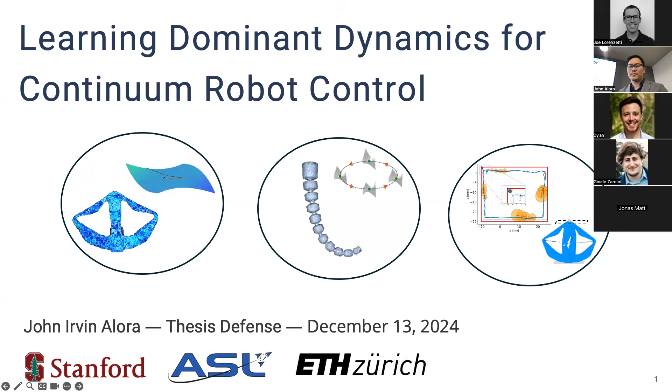My thing will start. Okay.

Before diving into my specific research, let me set the stage by looking at where we are in robotics today. Robotics is advancing rapidly, from household robots that can handle complex daily tasks to drones that can outperform human champions in drone racing. And I think what's critical here is that these achievements have relied on having accurate models, whether used for direct control or simulation-based learning.

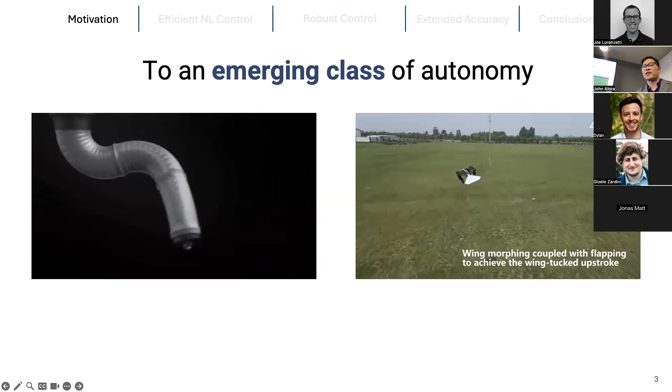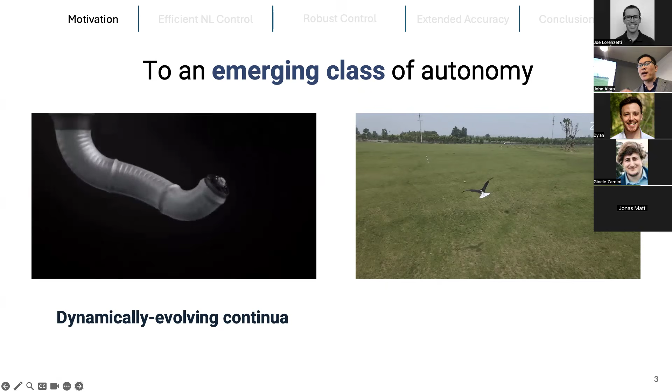But what if there are systems where deriving a model useful for control is difficult? This is the case for continuum robots, an emerging class of autonomous systems. Unlike traditional rigid body robots, continuum robots exhibit a dynamically evolving structure inspired by nature. These systems can bend, stretch, and flex like living organisms, allowing them to navigate complex and constrained environments with remarkable dexterity. But with great flexibility comes great challenges. Continuum systems are inherently multi-physics, combining mechanics, material deformation, and in some cases fluid interactions. They also operate across multiple timescales and have many more degrees of freedom compared to control mechanisms, making them severely underactuated.

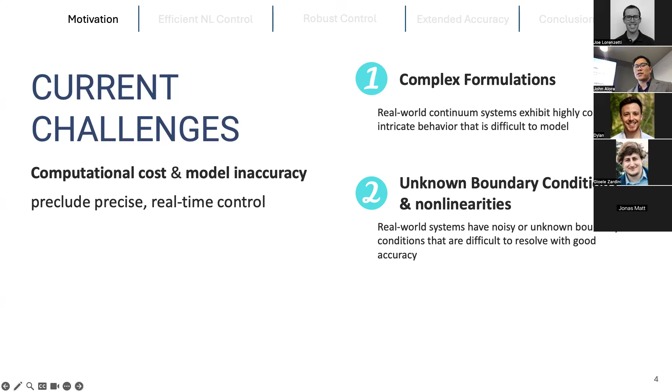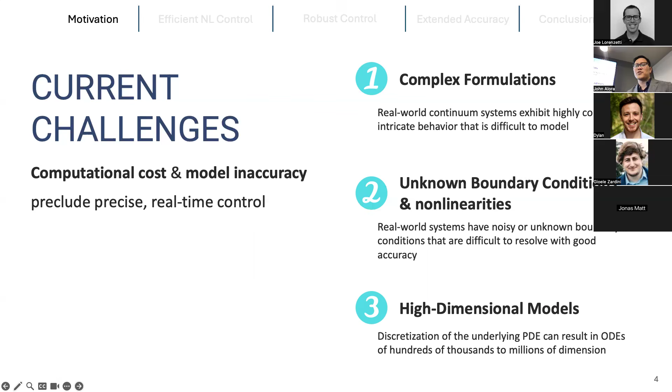This presents a variety of technical challenges. These phenomena result in complex models which need to describe how systems deform and move, as well as the intricate interactions between multiple physical phenomena. Second, these systems often operate with unknown boundary conditions. For instance, in practical applications like soft robotic surgery or underwater exploration, external forces and constraints may not be fully observable or predictable, adding uncertainty to the modeling process. Lastly, practical deployment for precise control tasks can result in models that are hundreds of thousands to millions in dimension. So these complexities really make deriving models for control incredibly difficult.

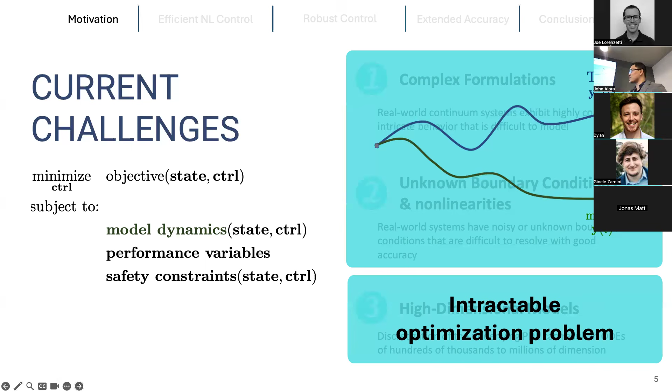More precisely, consider this constrained optimal control problem on the left, where we're trying to find a sequence of controls while minimizing some cost on performance variables and input, subject to the physics of the system. Due to the complex physics at play, inaccuracies stemming from the first two challenges can result in models that deviate significantly from the true system, resulting in poor predictions and hence poor control performance. While the third challenge results in high dimensionality of the model, making solving this optimal control problem intractable, especially if we want to do this in real time.

There are various approaches to overcome these challenges, which we can group into two classes: data-driven approaches and equation-based methods. Data-driven approaches try to learn dynamics from observed input-output transitions. Examples include neural networks, Gaussian processes, and operator-theoretic methods like dynamic mode decomposition. The inherent advantage of these approaches is that they're equation-free and non-intrusive—you only need data to characterize the model. The issue is that they're prone to overfitting, and it's difficult to quantify the uncertainty of the model, which presents challenges for safe deployment.

On the other hand, we have equation-based methods, which may also use data, but they use it to compress an already existing high-dimensional model, for example, like a finite element model. These include methods like projection-based model reduction, where you're trying to understand the evolution of your system's behavior on a linear subspace. The high-fidelity model here serves as a really strong regularizer that prevents overfitting.

But that same property that makes these methods robust also makes them cumbersome to implement, because extracting models from computational solvers is an encumbering and code-intrusive process. Furthermore, these models may still be too high-dimensional for actual real-time control when we use them in an embedded setting.

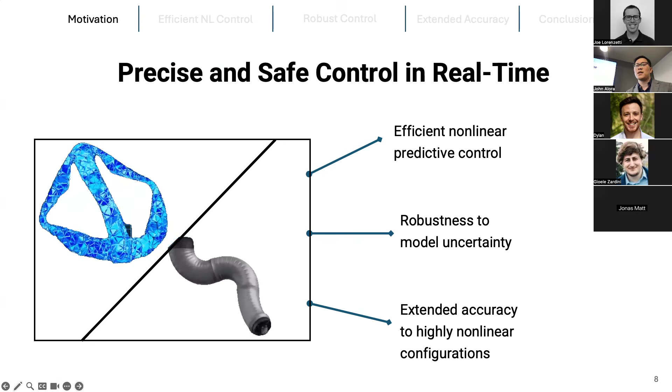In this talk, I'll focus on three core contributions I've made throughout my PhD: the introduction of a model-based control methodology that leverages learned dynamics on these spectral submanifolds, a method that guarantees this control scheme is robust to model error, and an extension of this methodology to achieve even greater accuracy when the robot significantly deforms, bringing us one step closer towards controlling these robots at the limits of their design.

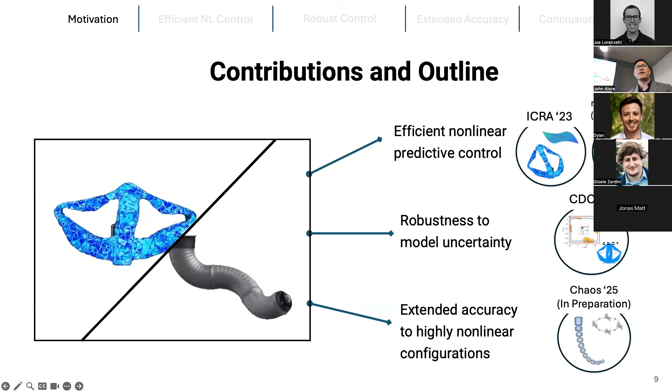This talk really summarizes the body of work I've published and presented to the broader robotics and controls community, all of which attempts to address the technical challenges inherent in enabling continuum robot autonomy.

Now, I want to ground these results by showcasing two types of robots. The diamond robot on your left is constructed from silicone and represented in both finite element simulation, approximately 10,000 dimensions, and an actual hardware replica of that robot. The control mechanism for this system consists of 4 cables pulling on its elbows to achieve a desired motion.

The second robot we'll consider is this trunk robot, also made of silicone, represented by a roughly 4,300 dimensional finite element simulation. It's controlled using a system of 4 cables that terminate at the midpoint and another 4 that terminate at the tip. The task is to control these robots so that they follow a pre-designated trajectory.

Now that you've seen the robots we'll be working with, let me walk you through the framework that enables their control. In this part of the talk, I'll briefly introduce what a spectral submanifold is, how to find low-dimensional dynamics on it, and then describe our model-based control methodology. I'll then present results where I compare the spectral submanifold reduction-based method to state-of-the-art baselines.

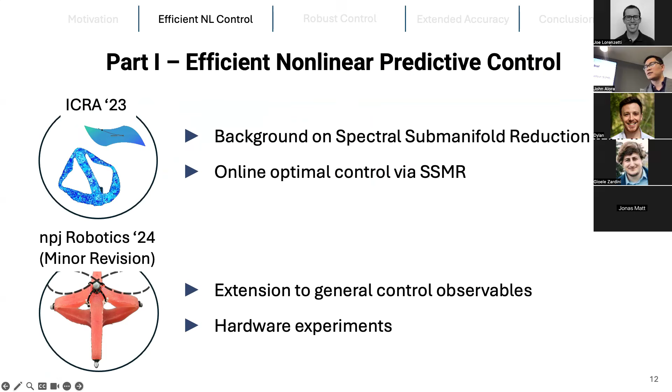Throughout this talk, I'll reuse some terminology that may not be standard. So to make sure we're all on the same page, I'll briefly recall some basic linear algebra facts that hopefully will help us build some intuition, while being just precise enough to really appreciate the methodology.

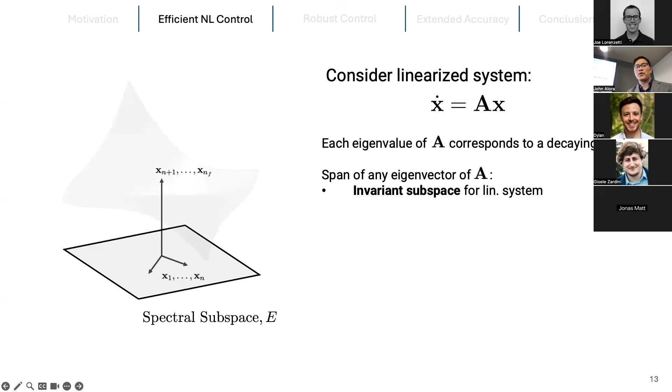So we'll start with the dynamics of a stable linear system defined by x dot equals Ax. In this system, different components of the dynamics evolve at different rates, determined by their eigenvalues. The slow modes are the components that evolve the slowest and persist over time, while the fast modes are the components that fade quickly.

Now, by grouping these slow modes, we define what we call a spectral subspace, which is essentially the space that carries the dominant long-term behavior of x dot equals Ax. More precisely, this space is spanned by the eigenvectors corresponding to the slowest eigenvalues. Crucially, this allows us to understand x dot equals Ax in terms of the slow modes while ignoring the ones that don't contribute to its long-term behavior.

This idea is really the basis for reduced order modeling, where we're trying to construct computationally efficient models that yet accurately capture the system's behavior, by constructing models that focus on the slow, persistent behaviors of the system.

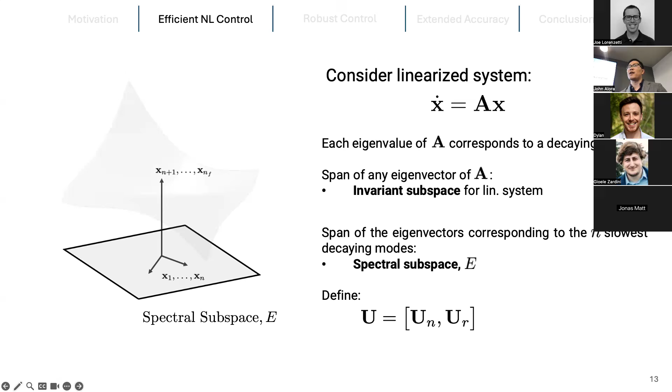Now that was for an unforced linear system. Let's ramp up the complexity a bit by adding this nonlinearity, but still staying in this uncontrolled case.

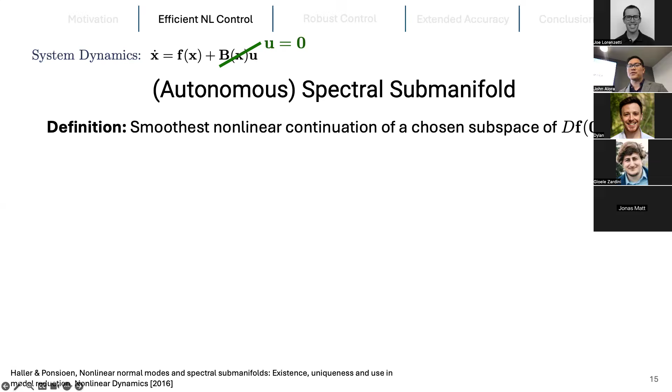It turns out that under technical non-resonance conditions on the slow modes of the system, the flat plane which defines the spectral submanifold or spectral subspace deforms into nonlinear surfaces or submanifolds which carry the dominant modes of the system. So intuitively, I can obtain the linear part of the dynamics of my robot, say by linearizing at its resting position.

I then group the slow modes commensurate with that linear part to define a spectral subspace, and deform that flat plane into a nonlinear surface. In the same way the dominant dynamics of a linear system can be understood by this flat plane, we can understand the evolution of the dominant dynamics of a nonlinear system by this surface or submanifold.

Now, an uncontrolled spectral submanifold is defined as the smoothest of these surfaces, in other words the surface that we can take the most derivatives on. And since this manifold is just a deformation of the spectral subspace, it has the same dimension, which means it's also low dimensional.

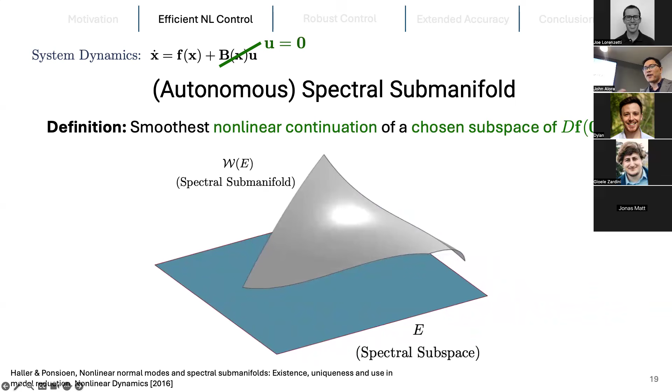Furthermore, it's an invariant surface, which means that once the trajectories land on this SSM, it stays on the SSM. Combining that with the fact that these robots' trajectories converge to the manifold exponentially fast, it is precisely the structure that effectively describes the dominant dynamics of this uncontrolled nonlinear system.

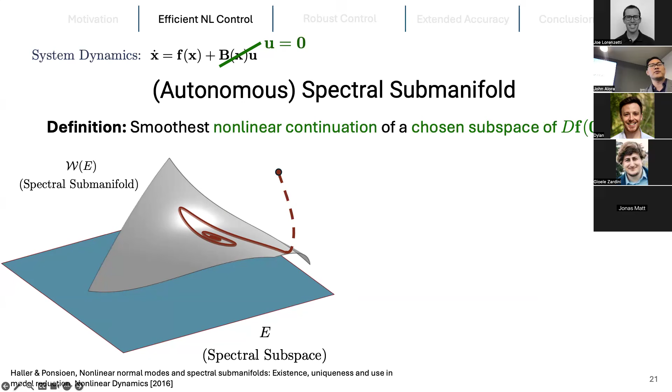Now, the nice thing in practice is that these SSMs actually exist for many dynamical systems, including our continuum robots. And when we add control, it turns out that these structures continue to exist, but in a time-varying analog of this unforced SSM. Recent work proves that the uncontrolled SSM actually survives as a time-varying manifold defined along the controlled trajectory, which too exists for our continuum robots.

And intuitively, the new target trajectory shown here actually takes over the role of a fixed point. And so we can define an SSM that's attached along this controlled trajectory. It's also exponentially attracting all of the trajectories of the robot onto it.

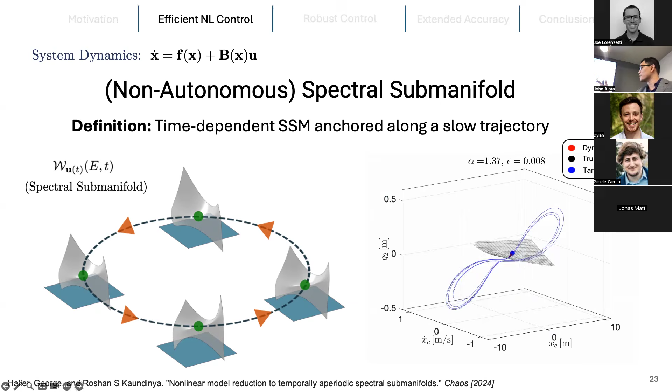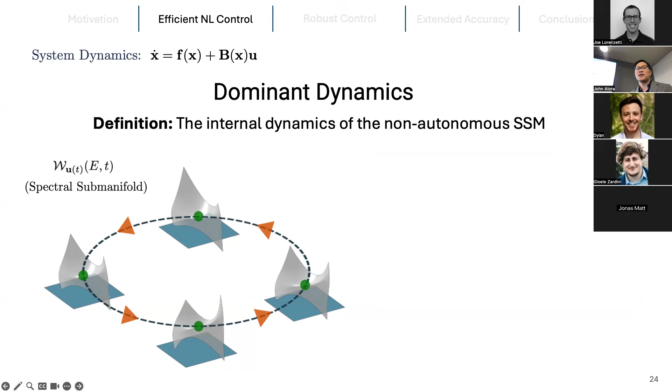And so when I talk about the dominant dynamics of my controlled robot, I'm actually talking about the dynamics on this non-autonomous SSM.

Well, it turns out approximating the dynamics on the non-autonomous SSM is actually challenging and may not be necessary if the target trajectory is sufficiently close to the robot's resting equilibrium.

And so in the first part of this thesis, rather than approximate the full time-varying SSM, which might be computationally difficult, we'll actually just approximate the uncontrolled part and then calibrate the learned dynamics for control. So we'll jump right into it.

The desiderata of our model that we're trying to learn: we'll try to learn a chart map, or in machine learning parlance, an encoder map, which encodes our observable measurements into reduced and latent coordinates. The reduced dynamics in this reduced latent space, and a parametrization map or decoder, which decodes the reduced coordinates into our original observables.

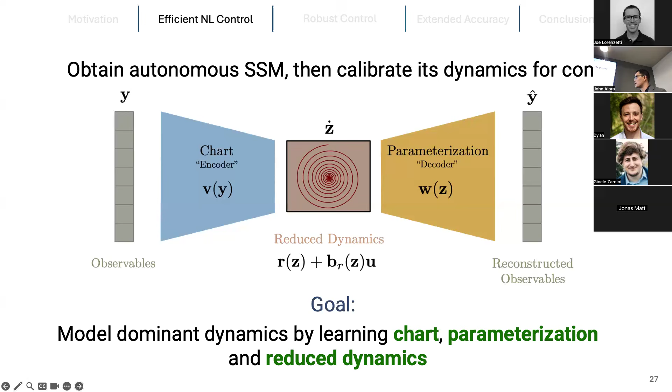Now, tying it back to the physical interpretation of the system, this chart map will be in the reduced coordinates defined by the dominant modes of the system, right? So we'll get these dominant modes via SVD, or singular value decomposition, of the system's evolution.

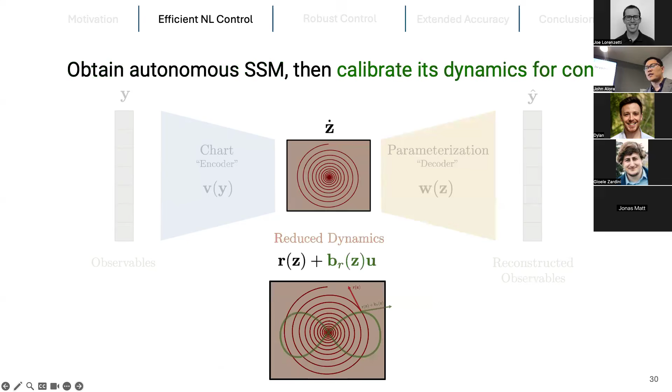We'll then obtain the parametrization map by fitting a function that minimizes reconstruction loss between the reduced coordinates and the observables, and then essentially fit control dynamics in our reduced space.

Okay, great. But you're probably thinking, how is there any hope that you're actually learning the dynamics given some generic measurements? Well, luckily, we can rely on fundamental results in nonlinear dynamics, which basically say that there is hope in detecting these dynamics from data as long as you have enough measurements.

And if you don't have enough sensors to measure, you can actually just take time-delayed measurements, and you can guarantee that you can detect these dynamics. So that's what we'll do: we'll pick sufficiently time-delayed measurements of the robot's end effector as the observables that we work with.

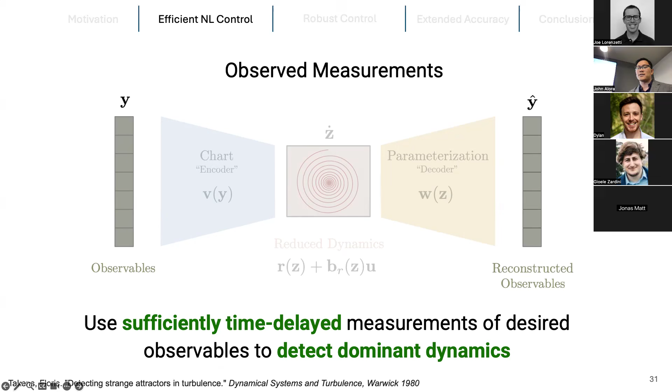Now, to infer the uncontrolled SSM, we'll start by collecting decaying trajectories of the system, observing, say, the tip of the robot. And to ensure our trajectories trace out the geometry of the surface, we'll truncate the transients from the trajectories to form our decaying data set.

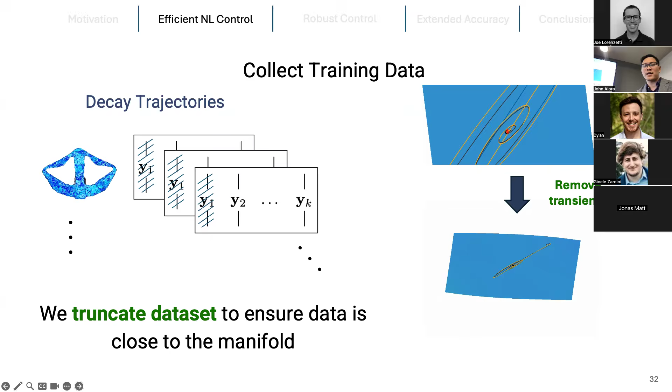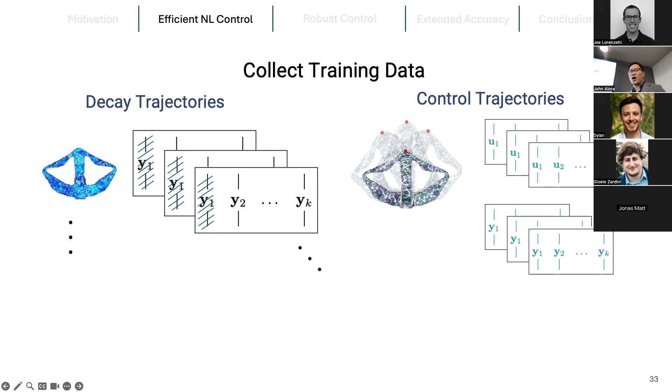Once we've collected data that'll characterize the uncontrolled dynamics, we'll then collect controlled data by simply applying random inputs and measuring the system's response. And I want to pause here and foot-stomp a really important point, which is that we're deliberately disambiguating the uncontrolled and controlled trajectories because it allows us to better capture these dominant dynamics.

Remember, our goal is not to fit a model to individual trajectories, but to this phase-space structure, to this SSM. And so fitting dynamics to the uncontrolled SSM serves as a really strong inductive bias towards fitting a model for control, because control trajectories will be close to this surface.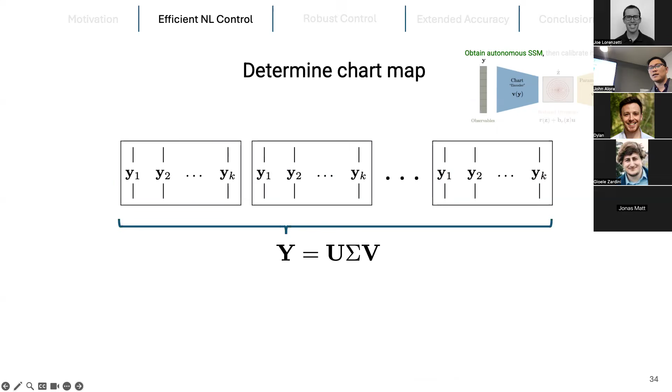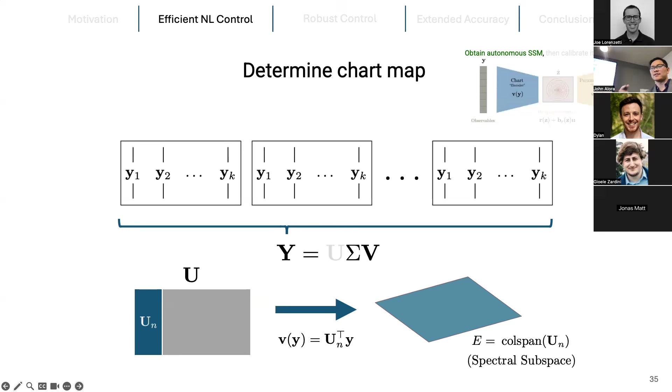Now, with this curated data set, we can proceed to learn our appropriate maps. First, we'll infer the chart map by conducting an SVD on our decaying data set. Then, by standard principal component analysis, we'll keep the top n singular values, capturing 99% of the variance in the data. This gives us the left singular vectors of the data matrix, whose leading n columns span this spectral subspace.

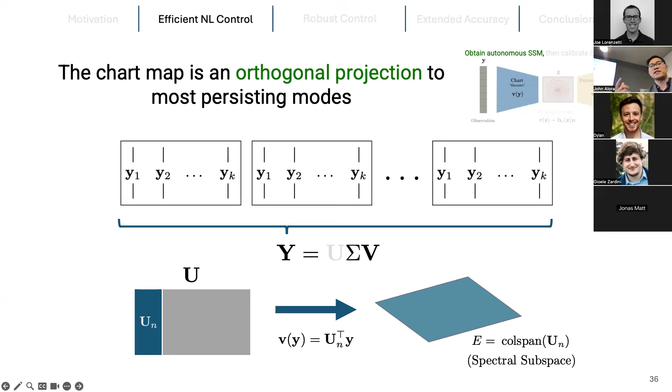When we construct the SSM, the chart map can be interpreted as defining an orthogonal projection onto the most persisting modes given by the spectral subspace.

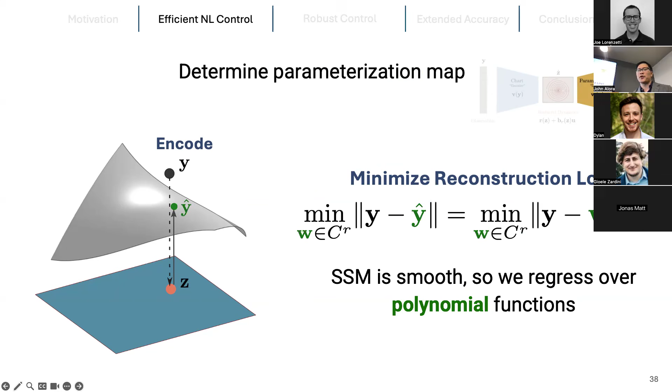Now that we have the chart map, we can take our trajectories and encode them into reduced coordinates, and then fit a map which minimizes the reconstruction error between the reduced coordinates and the observable space. Since the SSM is smooth, we'll opt to regress over polynomial functions. But in principle this can be any ansatz you'd like: radial basis functions, Gaussian processes, even neural networks. Knock yourself out.

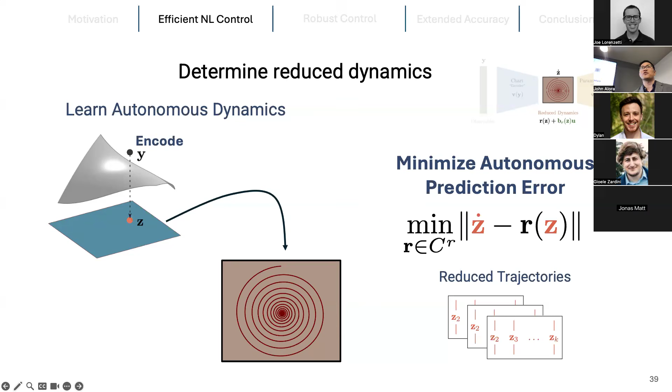Similarly, we'll fit the uncontrolled reduced dynamics by minimizing one-step prediction error. But this will only give us a description of how the robot decays to its resting position from some arbitrary initial condition. So to calibrate this model for control, we'll take our controlled trajectory data set and encode them into reduced coordinates using our chart map.

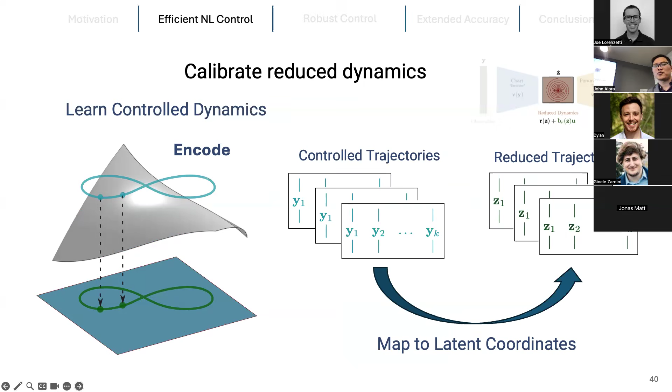Then we essentially regress the difference between the flow predicted by the uncontrolled dynamics we just learned and the flow of the true system encoded in the reduced coordinates, to learn a control vector field which results in the controlled dynamics to the right.

Now that we have all of the components of the model—the chart map, the controlled reduced dynamics, and the parametrization map which reconstructs our measurements—let's see how its predictive capability fares.

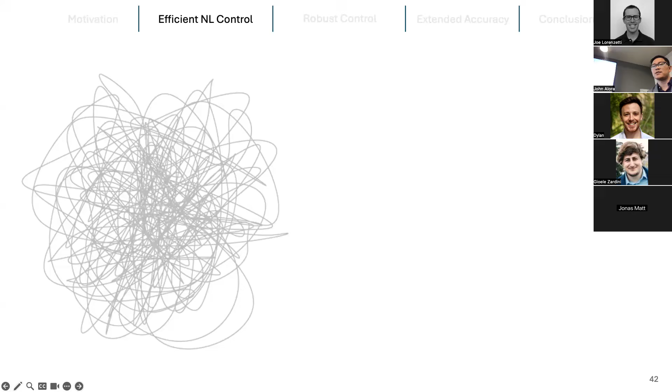To evaluate this, we'll collect a trajectory from the true robot by applying a random input sequence to explore its workspace. Then, with this data set, we'll randomly sample points along the trajectory.

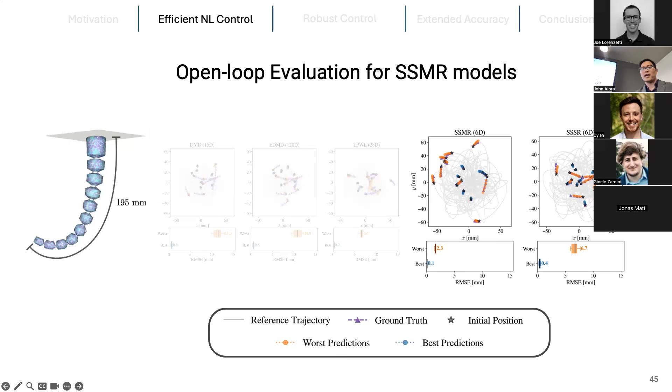What I'm showing here is a model that learns the dynamics on the nonlinear surface, denoted SSMR, and a simplified version which learns a model on the flat plane called spectral subspace reduction, SSSR. As expected, when we compare the two, SSMR outperforms SSSR because these linear models are unable to capture the geometric nonlinearities that manifest as the robot traverses this trajectory.

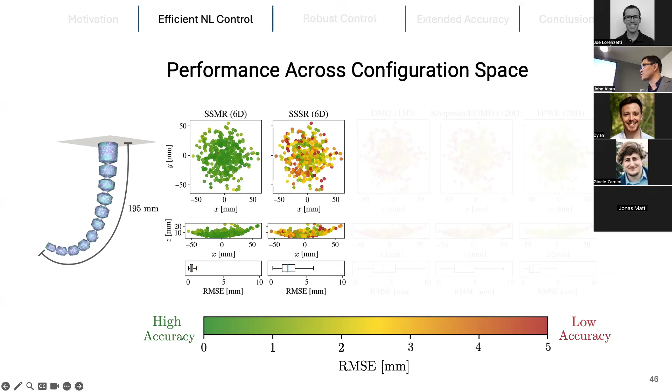Here, I'm giving a more global perspective on performance, doing the same exact evaluation as in the previous slides but for more points. We see that our nonlinear model outperforms our linear simplification again, and significantly outperforms the state-of-the-art baselines in continuum robot control.

We see that despite the fact that our SSSR models are linear, they outperform data-driven baselines, showing that capturing the dominant dynamics with a well-structured model can actually be more effective than approximating nonlinearities indiscriminately.

Furthermore, even though SSMR is fully data-driven, it outperforms this trajectory piecewise linearization method, which was derived from and was a compression of the true finite element model—further evidence that we can indeed get the best of both worlds.

And so now we close the loop and evaluate how well our model performs in trajectory tracking tasks. Specifically, at each control period, we observe the state of the robot, encode its state in the reduced coordinates, and then solve an optimal control problem using our model to find the optimal actions.

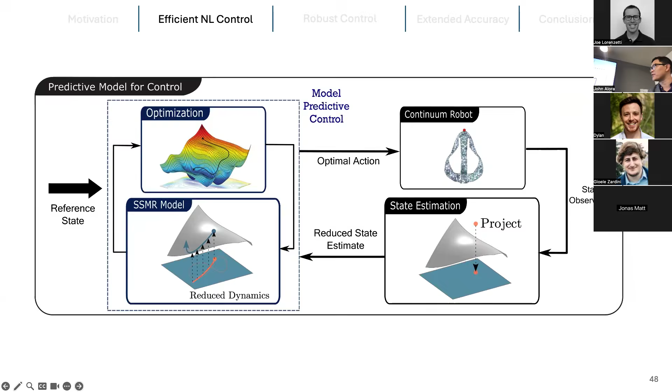The optimal control problem involves trying to achieve an objective while minimizing costs, subject to state estimate in the reduced space, the dynamics in that reduced space, and the desired observable and/or performance variables, for example the end effector of the robot, and the constraints on the robot.

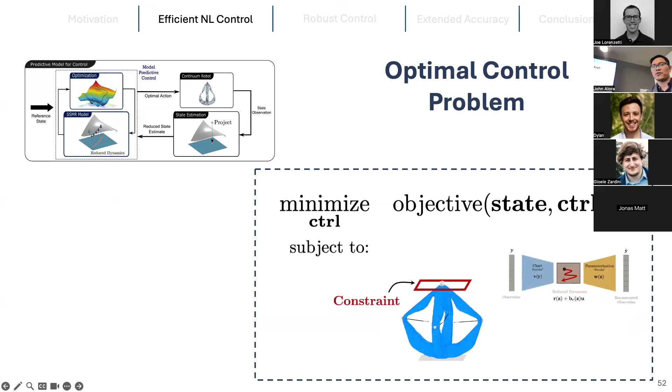Remember that the original robot is thousands of dimensions - in this case, this robot was 10,000 dimensions. The reason why we can solve this is because we use a lower dimensional surrogate to predict the robot's behavior. Surprisingly, when we compare SSMR-based models with our baselines, we achieve several factors of compression on top. This truly, I believe, allows for real-time control.

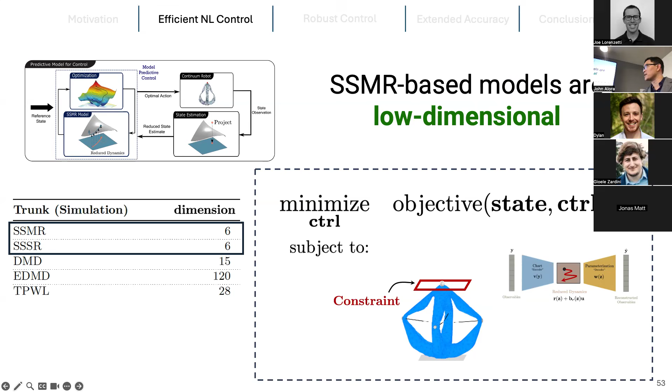Now, this observation highlights three things. Purely data-driven methods that just fit to individual trajectories tend to overfit, especially in the low data regimes. Priors essentially allow us to achieve better control generalizability. And we can actually get the best of both worlds - an equation-free method with the robustness capability of an equation-based method by focusing on learning the causal dynamics between input and output data.

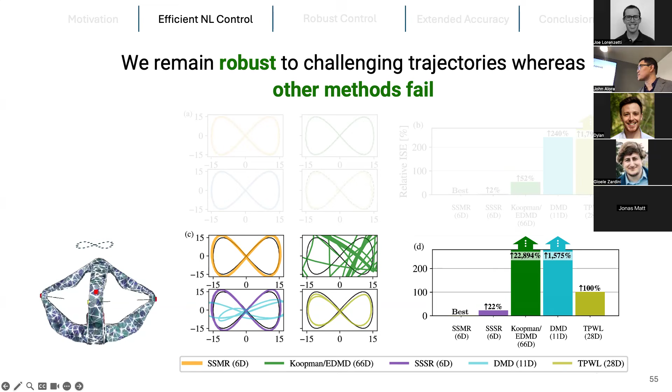Encouraged by these results, we employed these models on a real-world diamond robot and observed similar performance gaps between the baselines and our SSMR-based models.

So that wraps up the first part of this talk. In summary, what we did was we proposed an approach to approximate the dominant dynamics near an autonomous SSM. In doing so, we were able to learn compact representations of the robot in an equation-free manner, while outperforming both data-driven and equation-based baselines. And the reason why is because, again, we're learning the dynamical structure between input and output data.

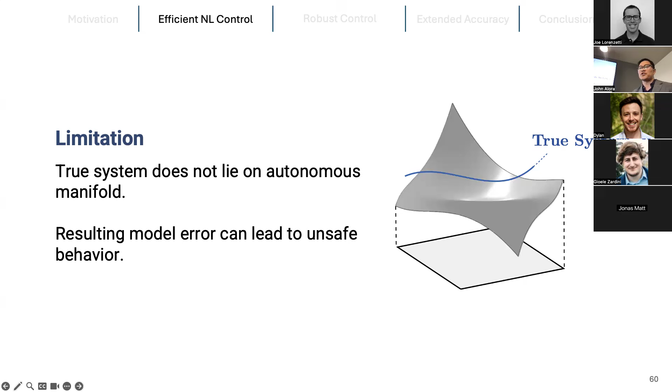Now, up until this point, while we can sort of impose safety constraints in our optimal control problem, it's with respect to our model. And because this model is a compressed representation of the true system, the true system under control may not actually satisfy the safety constraints. So in the second part of my talk, I'll tell you how we address this lack of safety guarantees by reasoning about the dimensionality reduction error and using it to design a robust model predictive controller.

So let's recall that we're learning a model that's anchored to this uncontrolled SSM and then calibrating that model for control. While this manifold or surface is invariant for uncontrolled trajectories, it's not invariant for controlled trajectories. But what we can do is think of control and disturbance as forces that push the true system behavior off of the manifold.

And we'll use that intuition to design a control scheme that controls the robot and ensures constraint satisfaction, even under model reduction errors. So in an attempt to build up that intuition, we want a controller that is uncertainty aware, such that when it gets close to the constraint, rather than allow the true system to violate this constraint, it proactively reacts to prevent the system from violating the constraint or becoming unsafe.

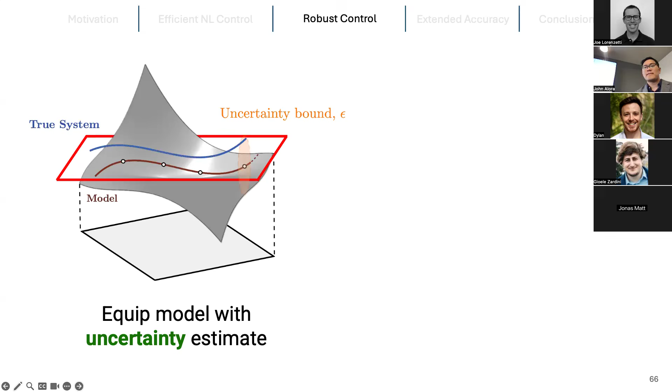Now, the core of being able to do this is to first equip our model with an uncertainty estimate that tells it the worst case error at any given time. And then, based on this worst case error, tighten the constraints for our model so that the true system is guaranteed to satisfy constraints and remain safe.

Suppose we have some constraints on our performance variables given by this inequality set. We tighten these constraints by constructing an error-bounding system which quantifies the uncertainty between the true system and the model, and then adding it to the constraint shown here.

To minimize conservativeness, we'll construct this error-bounding system so that it predicts error over the planning horizon, so it can adapt its uncertainty based on its state and its control.

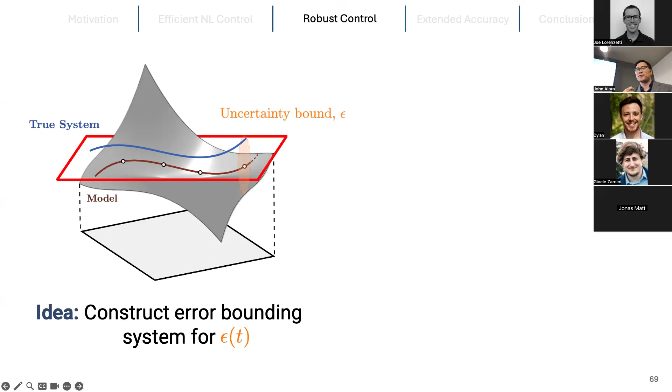Since we don't know the true system, which is extremely high dimensional, this task of quantifying the uncertainty is highly non-trivial.

Fortunately, the structure we obtained by learning models near uncontrolled SSMs will be useful in solving this problem. We'll use that same intuition as before, that control and disturbance push the true behavior off of the uncontrolled manifold, to help us characterize the uncertainty of our manifold-based model.

To be precise, I'll introduce some more notation and corresponding notions. The charted system represents the true system evolution in the reduced coordinates, while the manifold restriction represents its evolution on the manifold.

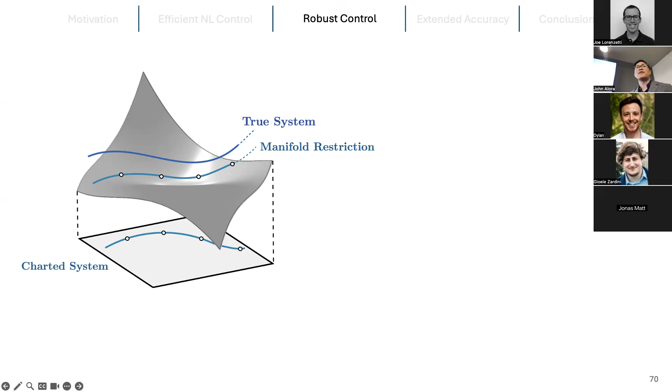In addition, we have our SSMR model discussed in part 1, which gives a reduced prediction and its commensurate prediction on the manifold, as shown here, which we'll denote as such.

The key idea is that by upper bounding the error between the true system and its projection to the manifold, as well as upper bounding the error between the prediction of our model and the evolution of the system in these reduced coordinates, we can construct an uncertainty estimate which upper bounds the worst case possible error between our model prediction on the manifold and the true system.

Looking at the first part, we can construct an error bounding system of the off-manifold error. When we stare at these equations, we see that it aligns with our intuition.

We see that it can be interpreted as the system being pushed off of the manifold when we take into account control. We have essentially a control term which quantifies how much the control pushes the true system off of the manifold, with the error being directly correlated with the magnitude of that control.

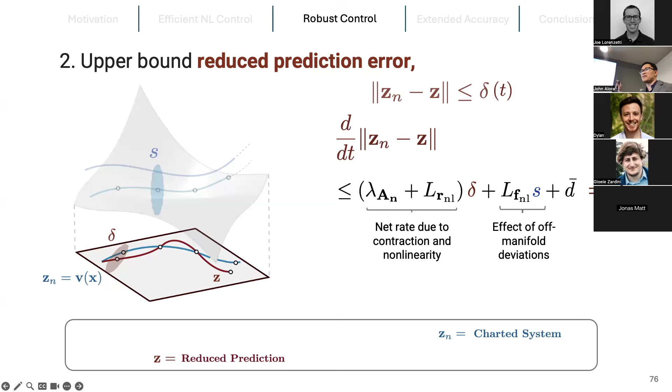Using these two quantities, we can then construct our uncertainty bound as being proportional to the reduced prediction error and the off-manifold error.

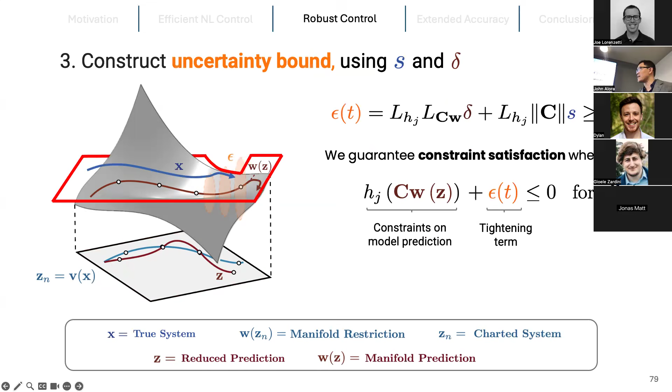When we add this to the constraint as a tightening term, it allows us to design an MPC scheme which guarantees recursive feasibility and constraint satisfaction, as well as asymptotic stability to a controlled set point.

To showcase the efficacy of our robust MPC framework, we consider the following example where we have a diamond robot's tip following a periodic square trajectory while staying within the desired workspace, then after following this trajectory, trying to track a set point on the boundary as close as possible.

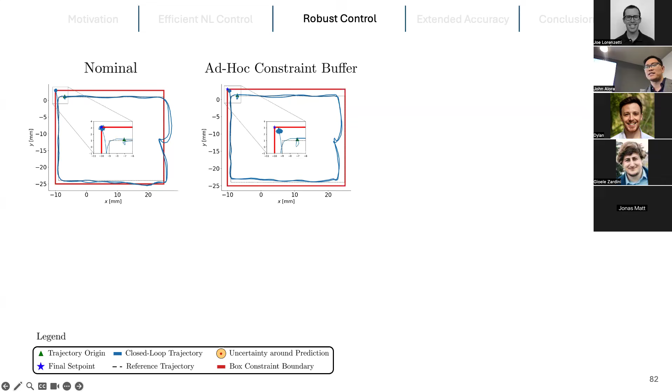To contextualize our method, we conduct simulations where we don't account for this model error—this is just the nominal MPC framework—and where we manually tighten the constraints.

As expected, nominal MPC violates the constraints, while our ad hoc constraint tightening scheme requires hand tuning to the particular control task, which in turn could lead to conservative behavior, and perhaps during the trial and error of tuning may cause the system to actually violate constraints, which would not be safe.

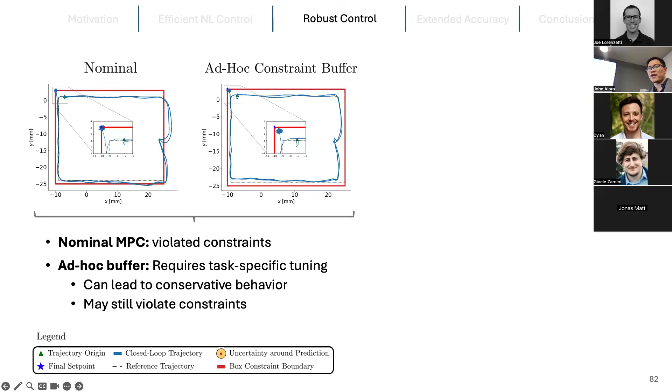On the other hand, our method achieves zero-shot constraint satisfaction. The constraints dynamically tighten, and it's recursively feasible and correct.

If we combine this robust MPC design with our model in part 1, we endow these robots the ability to safely act in the face of model uncertainty. Our methodology allows these robots to do this dynamically for any control task with minimum human intervention.

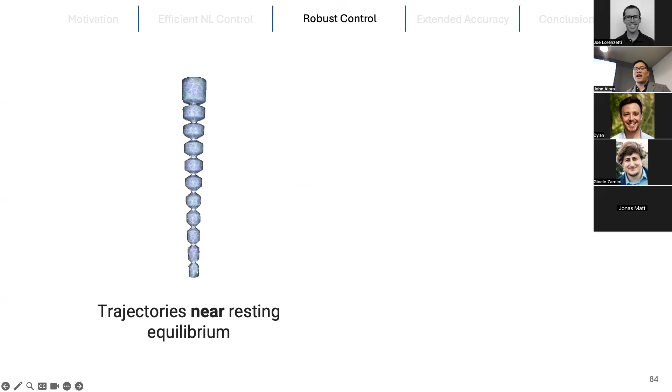So far, all of the control tasks considered have been tracking trajectories in the planar direction. But if we want these robots to be more useful and perform closer to the limits of their design, we need to extend the accuracy of these models to account for more geometric nonlinearities.

This brings us to the last part of this talk, where I discuss how we can extend the original SSMR framework to handle more interesting tasks where we have significant motions in 3D. Previously, our models relied on the assumption that the input was sufficiently small to ensure that the control trajectories were near the manifold at the origin. Here, we remove that assumption by approximating the SSM attached to control trajectories. This approximation comes from a spatial interpolation of local SSM models, and we'll show that these models are accurate when the control trajectory is sufficiently slow. Furthermore, we show that the model performance degrades gracefully with the speed of this control trajectory.

Let me try to make this a bit precise. Suppose I have this continuous reference trajectory that I want my robot to follow. I'll take discrete points of this trajectory, assume I can find some control to get to that point, and then construct a local frozen-in-time surface, or SSM, that's anchored to this new forced equilibrium. If I do this for each and every point along my reference trajectory, and then turn the time on, i.e., make epsilon greater than 0, then one can show that a time-varying SSM actually survives as a perturbation of the local SSMs that we've constructed along this trajectory.

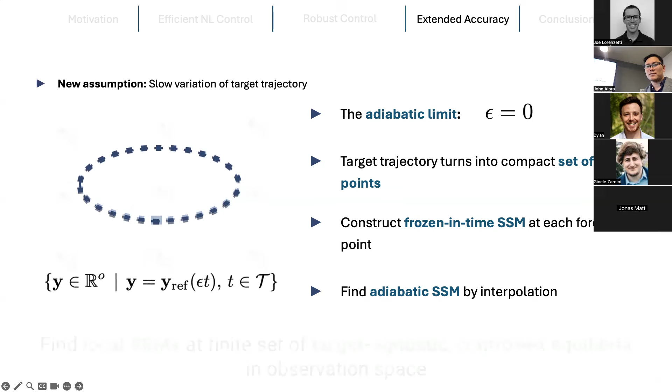So this theory is really constructive, because this means that there is hope in learning the time-varying SSM by simply interpolating local SSMs along the control trajectory of the robot. And so that's exactly what we'll do.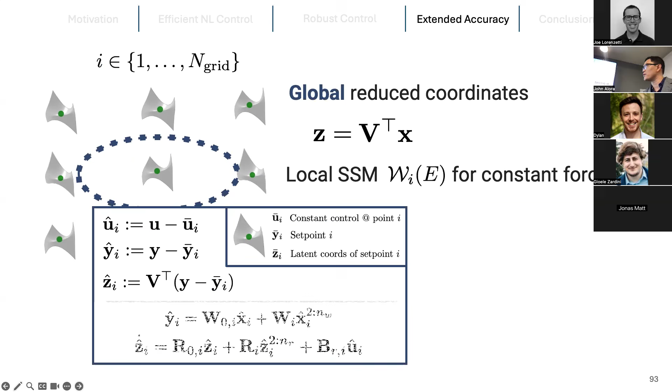We'll sample a grid of controlled fixed points in the robot's configuration space, and then construct local models at each controlled point. In practice, we'll follow the same exact procedure as in SSMR, but now we'll just collect decaying data at each forced equilibrium point. In addition, we'll collect a control trajectory data set in the same way we did in SSMR to calibrate these local models for control.

Now, with these discrete models in hand, during the control online phase, what we'll do is interpolate both the reduced dynamics and the decoder maps along this controlled trajectory. This gives us a global model that comes by way of spatial interpolation of these local models, which should give us a more accurate model for control, especially in more nonlinear regimes. This model will be a good approximation if the trajectory is sufficiently slow.

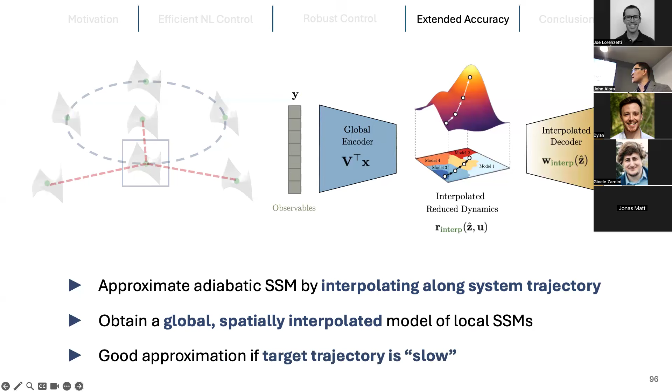Now, to verify this and to understand the effect of the control trajectory speed on the accuracy of these models, we'll evaluate the prediction capability of our model as we did in part 1. What we find lines up with what the theory tells us to expect: the model's performance degrades with increasing speed of the trajectory. While the original framework we propose, SSMR, has performance that degrades significantly with speed, we find that the adiabatic SSM models actually degrade gracefully, highlighting its superior robustness on top of these methods. This figure also highlights that our slow trajectory assumption is typically satisfied in practice.

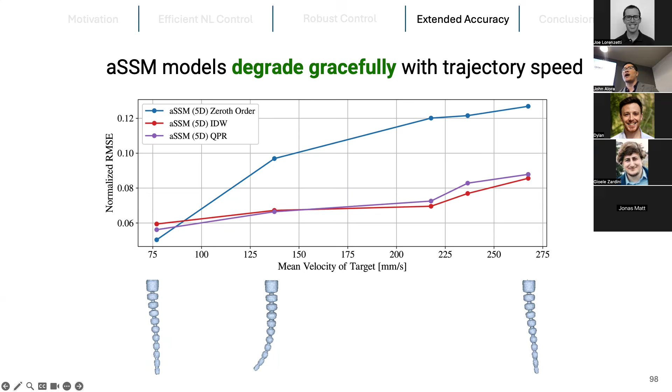Now, what we'll do is evaluate the closed loop performance of our adiabatic SSM model at varying levels of approximation. The 0th order approximation is our SSMR model described in part 1. The 1st order approximation is a model that takes the SSMR model and translates it along the trajectory. And lastly, the higher order approximation not only translates the manifold, but also deforms its surface along this trajectory. We expect that, for challenging trajectories, the accuracy will improve with higher fidelity approximations.

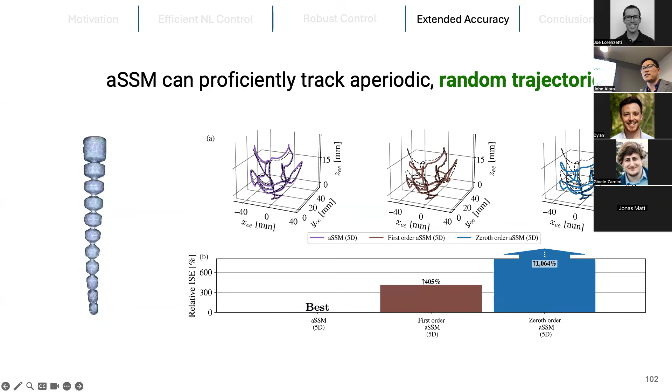Here I show that we can also track arbitrary trajectories, and that we're not necessarily restricted to these periodic regular trajectories. And so in summary, in this part of the talk, what I proposed was a new method that extends the accuracy of the SSM models. Taken all together, I hope that I've convinced you that leveraging dynamics-based priors help us learn compact, faithful, and robust models for continuum robot control.

I think this work is really just the first steps towards applying this dynamics-based framework to continuum robots, and there are many fruitful directions for future research. For example, we're currently applying our approach to a real-world trunk robot and aiming to even further reduce the data curation efforts to characterize these systems.

Now, one way to do this would be perhaps to learn the model components, the encoder, the decoder, and the reduced dynamics simultaneously using arbitrary data. Currently, we're learning them separately. Now, I would say that doing this in a way that preserves dynamical structure is an exciting and important next step if we really want to scale these methods.

I think another promising direction is to apply these methods to untethered soft robots for navigation and interaction. Extending control-based SSM models with contact could lead to continuum robots that can interrogate hard-to-reach and safety-critical places, enabling tasks like engine inspection and repair, where the soft body of the robot allows it to conform to tight spaces in an engine without damaging critical components.

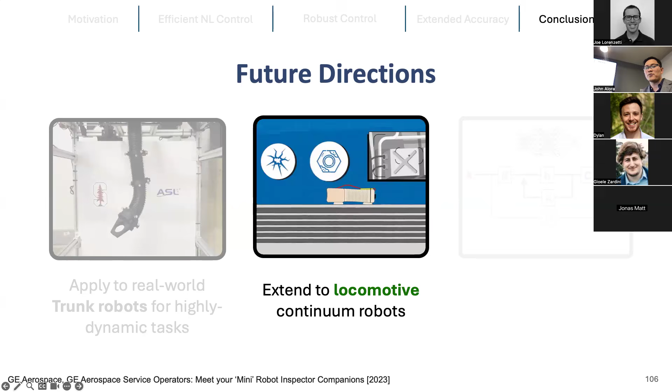I think if we apply these methods to this application, there's interesting questions that follow regarding what's the appropriate sensor modality to estimate the robot's proprioception, so on and so forth. And maybe these dynamics-informed constraints to preserve SSM structure could be used in a co-design framework to help design embodiment and task-based sensor arrangements for these robots to do these interesting tasks.

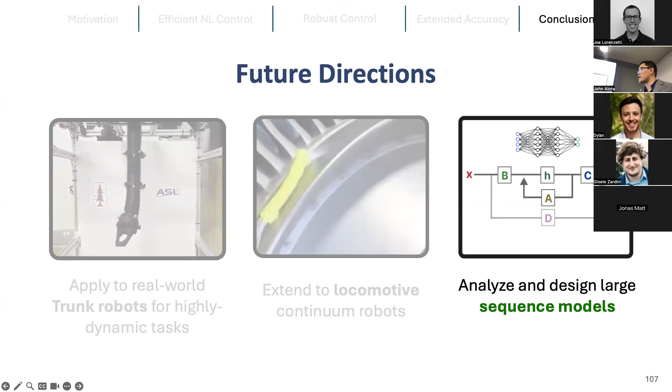And last but not least, the methods explored in this thesis are general and extend beyond continuum robots. For example, they could be applied to analyze and design these up-and-coming large sequence models, allowing us to reduce parameters by identifying the dominant parameters in these architectures, or creating architectures that are more robust to noise for time series prediction. This could enable new energy-efficient model architectures that we could then deploy on embedded computers on the edge.

And so with that, I'll conclude my talk.

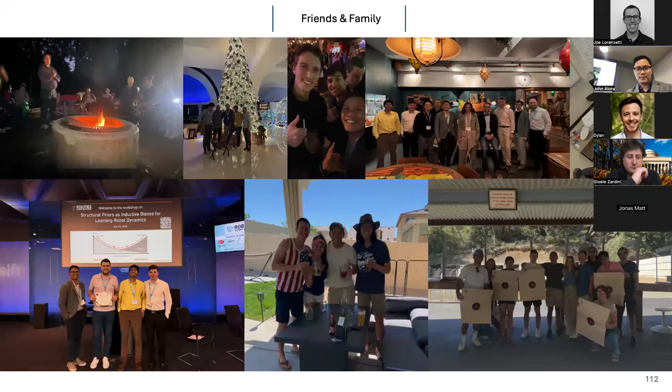So my question—if you could maybe go back to the beginning of your presentation, the first part, you were comparing some of the different models and their different performance, and I noticed you had put the dimensionality of the models, and I think the ones you were looking at were 5-dimensional or 6-dimensional. So I'm assuming that's just coming from the SVD, like you're just choosing 5 or 6 dimensions to capture the 99% of the singular value energy or whatever. That's right. So maybe could you just comment on how much better the models get if you include any more of the modes? Because it was actually quite a bit smaller dimension than the other models you were comparing against—so not only were you getting better performance, but it was with a lower dimensional model.

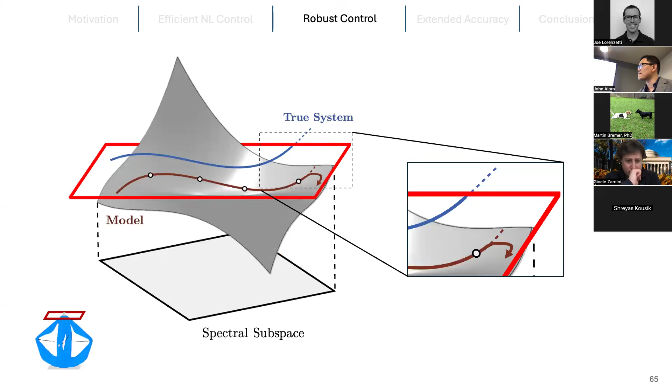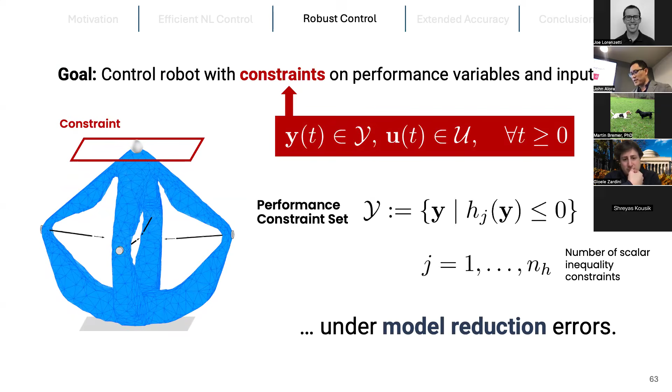Yeah, that's a great question. So I'll just repeat it here: the question was, if I increase the dimensionality of my model, do I expect better performance? In theory, you should expect better performance. The challenge is that when you're doing this SVD, you might actually pick up numerically just noise. And so if you try to increase the dimensionality of the model, it actually becomes more parametrized.

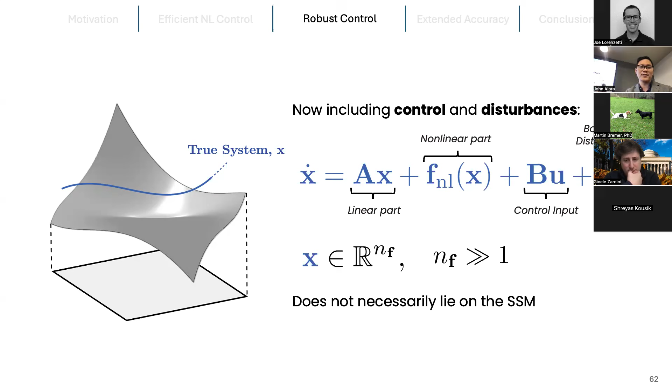You become more sensitive to the noise. And so what we found is actually that if we can reduce the number of dimensions by taking into account symmetries, the models actually perform more robustly, which is counterintuitive. But the idea is really that we're trying to learn very robust structures, and we shouldn't have to rely on more modes, if you will. We should really just focus on the ones that really matter. Otherwise, we run into the issue of overfitting and not generalizing.

And then as a follow-up question, is there anything about the particular form of your model that makes the actual control algorithm implementation harder? No, actually it's the same SCP that we use. We're using Gusto as well. There's nothing that changes. Okay, cool. Thank you. Nice presentation. Thanks, Joe.

Go ahead. Are you, in your framework, allowed to apply control that could potentially destabilize the system for more informative data, or are you constrained to only identification with stable data?

Yeah, in this case, that's a really good question. In this framework, we assumed that the fixed point that we're attaching this SSM to is stable. There is a deeper theory that guarantees that these things persist for unstable systems, even systems that have mixed mode stability. The practical challenge is collecting the data to characterize this. We didn't consider the case where we have a stable system, we introduce control, and then it becomes unstable. That would be interesting future work though, because indeed this is the case for a lot of physical systems.

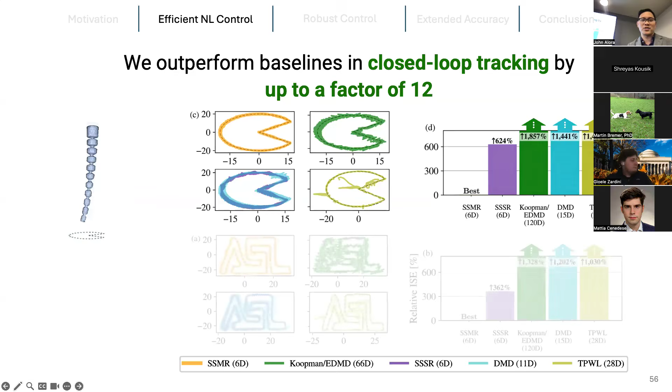Cool. Thanks. Great work, John. Thanks, Shreyas.

Yeah, that's a really good question. I would say that one of the assumptions that we made here was that our model perfectly characterized the SSM. And then we would sort of roll in the model error or the approximation of this SSM into the disturbance term, right? It would be really interesting to go and try to characterize or have an additional term that takes into account the fact that we've learned this SSM imperfectly. In that case, you might have to leverage some statistical tools to come up with a bound for this. But we initially tried this, and it was really difficult to come up with a practical bound. Everything was just super loose. But it would be an interesting thing to do.

But we didn't consider that here.